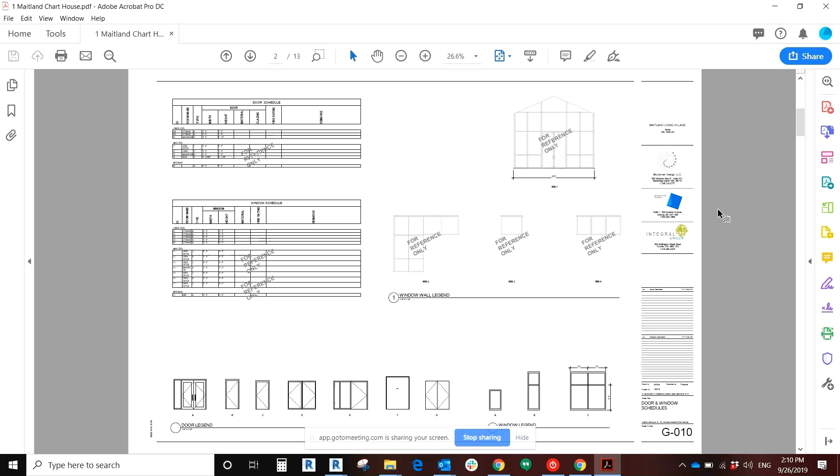And this has the drawings for the entire chart house, but we're really focusing on trying to coordinate the basement related stuff so that you guys can start doing things on the site in the next few weeks. I think we're trying to get you some coordination drawings by October 8th. So, drawing set. We have our cover page. We're starting to build out the doors and windows schedule, and we're just going to go pretty quick here so you get the lay of the land, but feel free to stop me if you want to zoom in on anything.

We have our assembly drawings, so we're going to have the basement floor similar to what you guys were originally planning, with the insulation below the slab, and then a radiant floor downstairs over the slab with the topping slab. The main level floor, currently we're designing it also to have a radiant slab, and we'll get into the full mechanical system in a few minutes here. The roof assembly is the same as you had originally been thinking in the original drawings.

Okay. And I do want to point out that we're wanting to get Pete's feedback in particular, and Todd's. If there's any details that you guys think we should modify, then we're very open to that. This is the current thinking, and included in that, of course, is this whole discussion around insulating the walls or not on the lower level, and those kinds of things. So I'll let Blake continue, but I just wanted to set the stage that this is a collaborative process.

We have been getting information from Integral that's informing us in terms of needed R values and implications and occupancy, and now we're at a place where as we run through this, we need to make some decisions with your help, and then we can make changes as we need to any of these details as a result of those decisions. Mm-hmm.

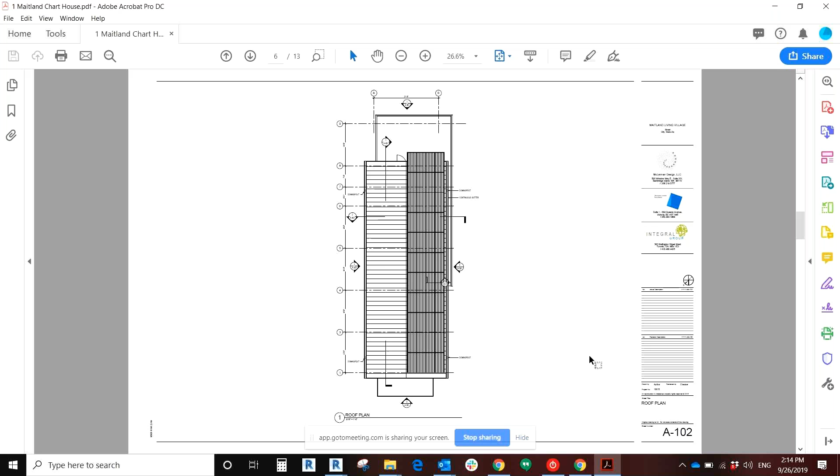The PV extends. Yeah, there's a bit of a drawing glitch here that the PVs would not overhang the roof, but the idea being that photovoltaics would be on the south pitch, and we're looking at having supply and exhaust for the ventilation system on the north roof, which isn't drawn here yet. Then we have reflected ceiling plans, where we're starting to show first pass at lighting for each level. The elevation, so this is reflecting what you've all seen in the renderings that we've been sharing with you.

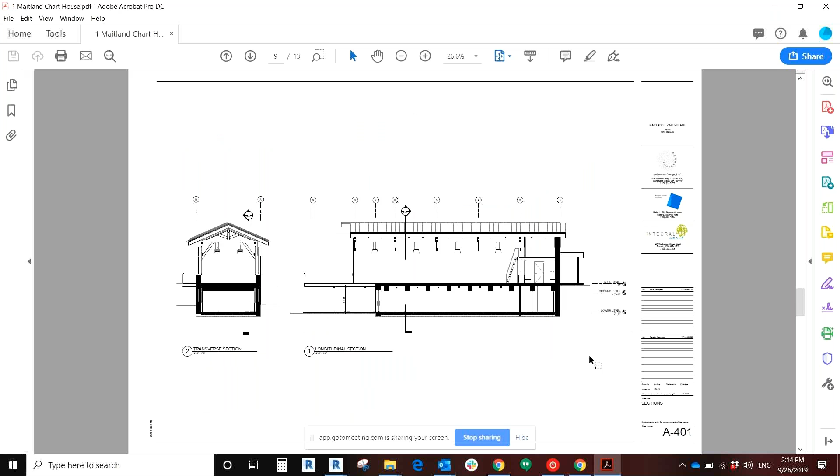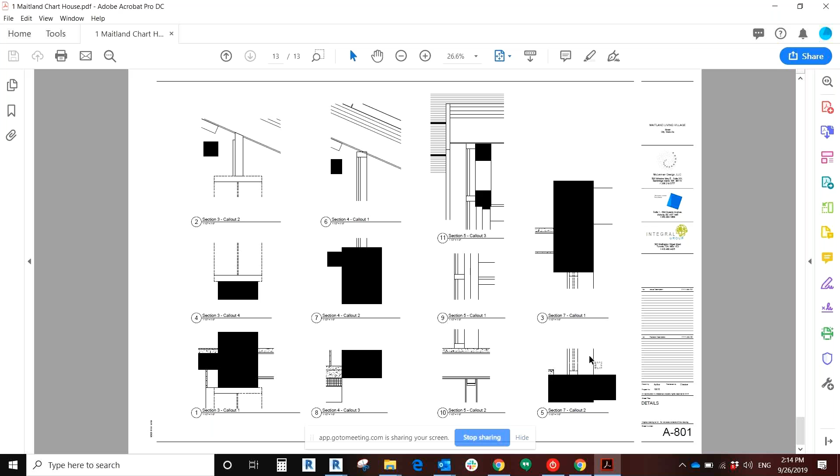And then building sections, enlarged plans for the upper and basement level washrooms. And then these are very much in progress, interior elevations. These are really just placeholders at this point. And then also placeholders, wall sections, and then we'll be drawing the details in the 800 series. So that's the way the drawing set is built currently. And then you want to do the MEP?

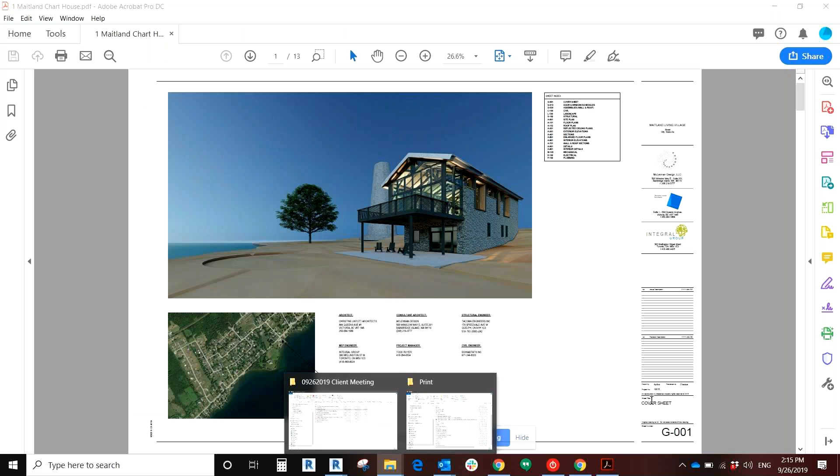Walk them through the MEP. Yeah. So why don't we pull up Integral's last set of sketches, even though we're changing things. I just got a question on the mechanicals on the outside on the east side wall by the front. Is there any way to disguise those things? Because it's very visible from the street, right?

I know. Well, we're going to want to put it in some sort of enclosure, some sort of wood enclosure or something. But the building is really public on all sides, or will be eventually, right? So yeah, it's probably the lowest value. We don't want to have it in the plaza side, and we don't want to have it on the side with the solar panels, because we think that's going to be more public, and we do think that driveway there is more of like a service drive as opposed to a big public access point. So it seems like the best general spot, but then we need to build a screen around it.

Does that make sense? Yeah, it is obviously a pinch point really with the deck there, right? In terms of access, I guess. You mean the front entry porch? No, I'm talking about the neighbor's deck that sticks over on our property. Yeah. I mean, we could push it downward a little bit, but it is relating to the equipment that's in the loft in that area. Right. Yeah.

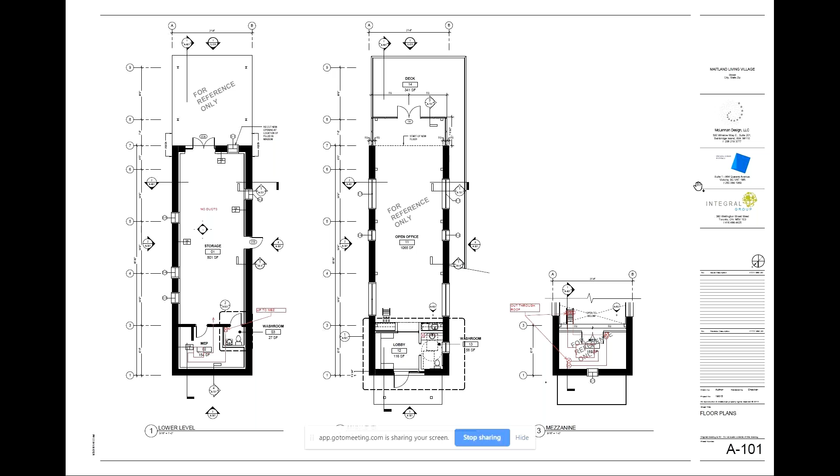So the condensers are for the ERV system. Yeah. Okay. So these sketches show, I guess we can't really zoom in too easily, show some back and forth that we've been doing with Integral, and so the big idea is that we have fresh air requirements and we have heating and cooling requirements, right?

The fresh air is being handled through an energy recovery ventilation system on both the basement level, which will be very small, and then one for the main level, which would be held in the attic, which would be a bit larger. And we're designing this to accommodate an occupancy load of about 35 people. On the upper level. And that's not to say that you couldn't have events with upwards of 50 people. It's just at the very highest peaks in the summer and the winter, the equipment's being sized for 35 people.

So we have this tension, as you guys know, in terms of what kind of building this is legally being described as, and we're describing it as an office building, which has a particularly low occupancy. But we want to be able to use the building for larger functions, and we think it will be. And so the question then is, in terms of the mechanical system and ventilation rates, where do you size this to? Which reality? And we don't want to size it so that only 12 people can be in the building at any one time; that's not a very sustainable thing when we want to have other events.

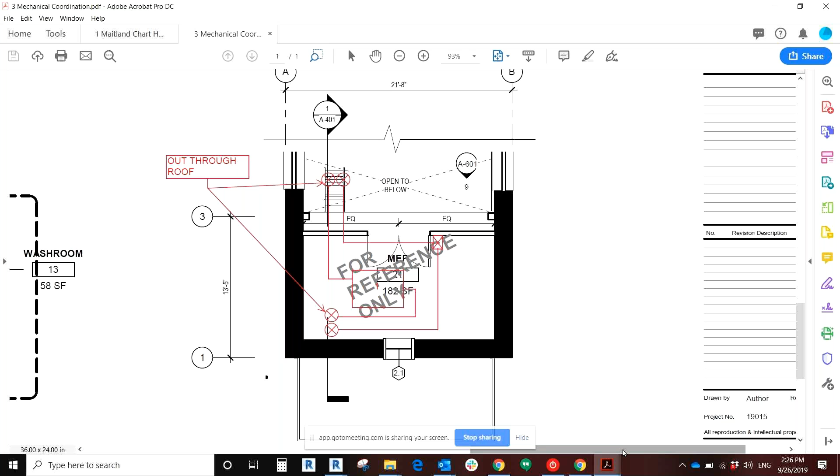But the only risk is still that when you run ducts through the space, which we have to do in order to get proper distribution, there are ducts running through the trusses on both sides of the building, from the entry side all the way to the riverside. And there will be some noise that will come through those ducts, the air movement, etc. Sure. We could presumably have a flexible plenum at or near that baffling wall, right? To kind of attenuate some of that.

Would doing a larger diameter pipe do anything on that, or is it counterproductive from a flow perspective? Well, usually Integral is pretty good about trying to specify low pressure drop, low velocity, large duct systems. Okay. And so we can circle back with them on the pressure drop issue. But at the same time we're a little bit limited on the area within the trusses that we have to run the ducts through. Yeah. So it's always a balance of those things.

So we'll just reiterate to them again that we're trying to attenuate noise as much as possible, and we want to make sure that the ventilation isn't straining, so to speak, and therefore creating additional whistling or any other noise. Yeah, and that's great. It's just nice to mention the sensitivity and say, if there's an extra little mile here, I'm motivated for that, right? Yeah. It helps, because sometimes they focus on, it's a little cheaper, and you're going, well, to me, those are things you live with for the whole life of the building, and every day.

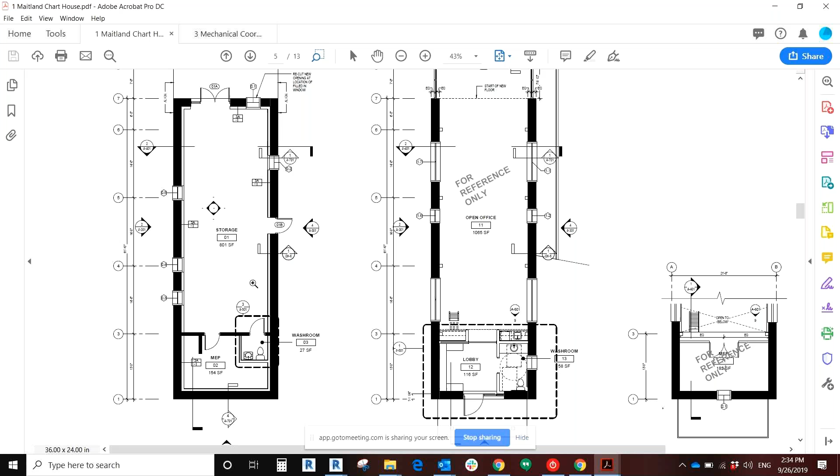So sort of similar to how you draw radon from underneath the floor. You could similarly intermittently pull moisture out between your insulation wall and the stone. I know it sounds kind of Inspector Gadgety, but I think it's a useful direction to think about.

I think a moisture professional is helpful. We actually were not ever planning to insulate the stone wall. It was planning to be covered with a lime plaster, and so the upper part wasn't going to be insulated. All of our research was from Europe, where they're trying to retrofit 6 million stone homes, right? And to their chagrin, all of it kept coming back saying, don't insulate, because if you insulate, then it leads to a premature failure of the wall. And that's one of the things that document that I sent to Blake indicates.

John Cook, it was interesting. Jerry, the engineer, was here as well yesterday. And he knows John, and he said it's hard to find anybody better than John. He said that's probably not what you could say about his competition, but that's where it is. And John's pretty adamant that this masonry will fail.

Yeah. The room in the basement, the old walls were cladded with studs and a tongue and pine, and the studs did not have any rot to them. But Pete and I were talking about this earlier. There were many spots on the walls that had experienced significant mechanical failure in the masonry, and the masons had to do a lot of significant repair. At one point, right on almost to the outside of the building. It's hard to say whether that was the result of even that little bit of buffer there or not.

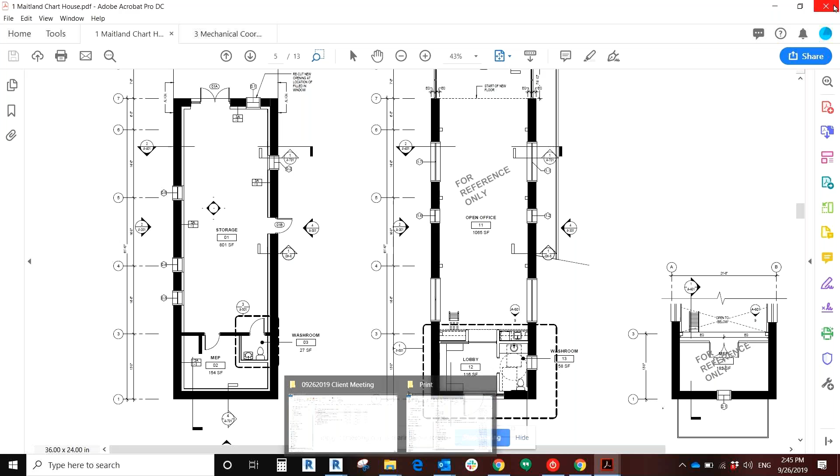Okay. Should we switch over to septic strategy? And why don't we pull up the... Oh, what about the point cloud guy? Has he come and finished his work? Or am I missing the timing on that? I thought he finished his work and went home. Okay, so we haven't received his product yet that I'm aware of. Okay, we'll follow up, but he did come. Okay. Yeah. Jerry was really interested to receive that as well for the building.

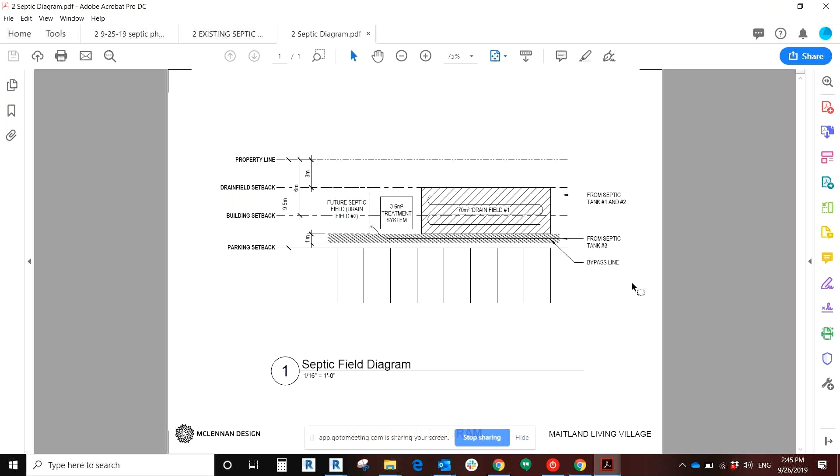Of course. And by the way, Juan was going to get after you, Blake, because he wanted those drone videos. Oh, okay. Yeah, I'll send those right over.

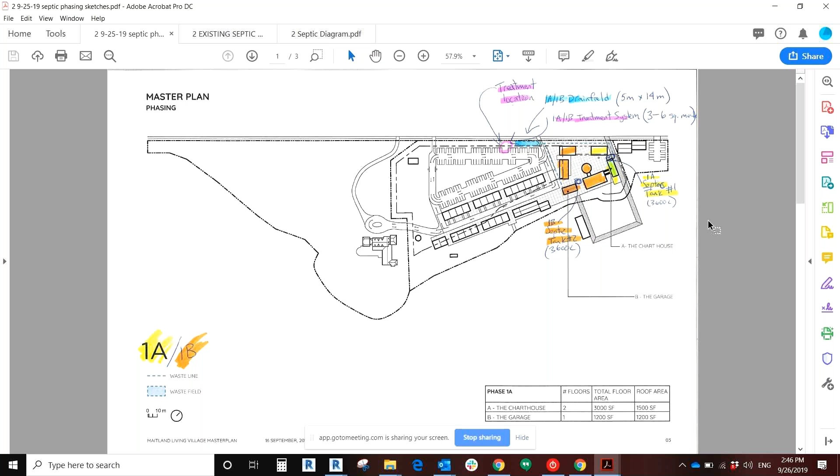Okay, so why don't we go to Pete's sketches first? Sorry if this is a scribbled sketch, but we've been throwing a lot of ideas back and forth. This is over an older iteration of the master plan, so we don't need to look in too much detail. But generally, the idea would be for the chart house, we'd have the septic tank to the side, as we were showing in the previous drawing. And then from there, it would be pumped over to a drain field, which is shown in blue along the road.

And we have a more detailed drawing that shows the required setbacks and everything of that drain field from the road and the property line, which we'll get to in a second. And there would also be a little treatment area associated with that, and both the drain field and the treatment system would be sized for the future construction of the yellow building and the 2 or 3 orange buildings here, if you point to those 3. So it would be oversized for the chart house, but it would be in anticipation of those 4 buildings coming in the future.

And then when the building adjacent to the tower gets constructed, another septic tank, number 2, would be added, and you can point to that, which would then be pumped up to that drain field that had already been sized to accommodate it, to that light blue zone there. So does that conceptually make sense?

Looks good. I like the idea that it's as far to the edge of the property as possible, because we're probably going to be playing sort of like Tetris with wells and septic fields and stuff like that over the years. And I like the idea that it's as far away from potential wells as possible. Yeah, I think the requirement, if I remember correctly, is 50 feet or something like that. Oh, well, I think it's 100. It could, yeah. I think it's 100. Yeah, for the drain field.

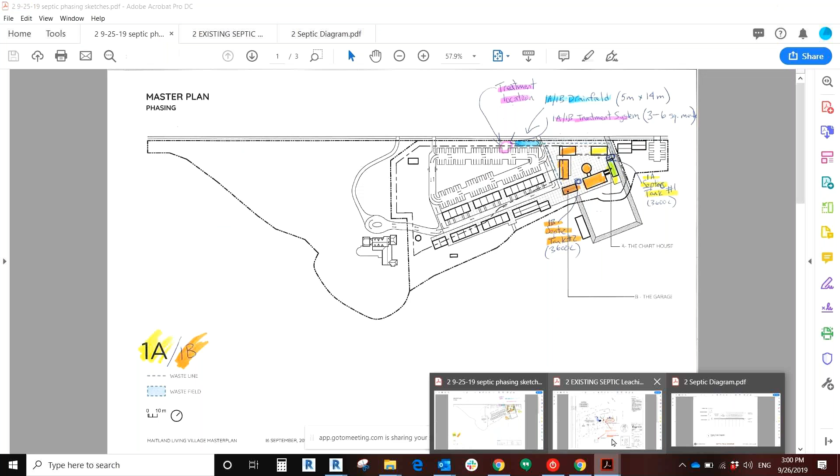So to the extent that we can start preparing the work that's needed to be done anyway for the chart house lower level, and try to determine what the contours of that rock ledge are, that would be very useful. And we can float around the exact location of the septic tank if we know the extent of our limitations. Okay, so maybe we get Luke in and peel back the concrete closer to the ledge, break it right at the edge and then see where the cliff really ends up being.

Would that make sense? Well, I think what Jason's talking about is doing the excavating all around the chart house so that we can complete the drainage work, which is work we have to do anyway, and that will give us a reveal of where the bedrock is. Oh, okay. Yeah, let's get going. Okay.

Our goal is for you to be able to place that slab in the lower level and get the lower level moving forward as soon as we can. We've just been having to do enough due diligence on the overall building to make sure we weren't painting ourselves into a corner on some other issue. I feel like we're getting close there.

We still need to talk to Integral one more time about the idea of using the river water for preconditioning. We need to check on a couple things, but I'm hoping that we're very close to being able to say go under your existing permit, and let's start getting that slab in. Let's start getting everything into the lower level.

So it seems like we're already there in terms of clearing an area around the perimeter of the building to start getting ready to put drains in and all that. Might as well get that going while the weather's still not bad, if you guys agree. Oh, go ahead, Pete. I think we'll gain a ton of information from that, and it would also be nice to have the weeping tile and the dimple board, et cetera, outside. I think that's a good forward step.

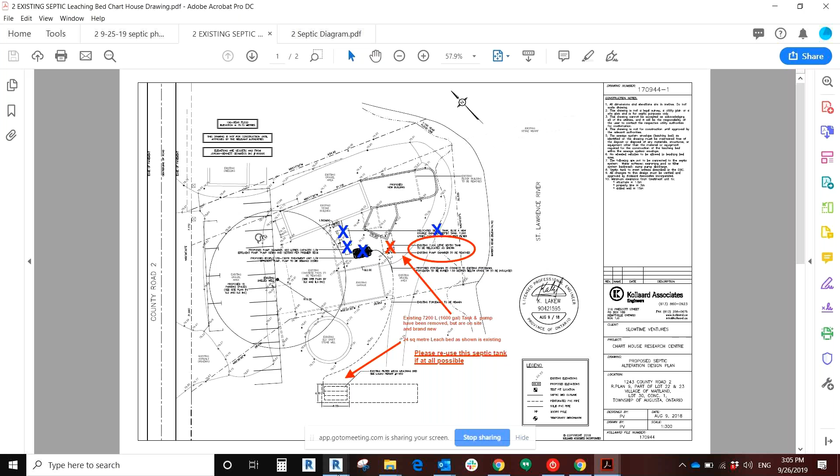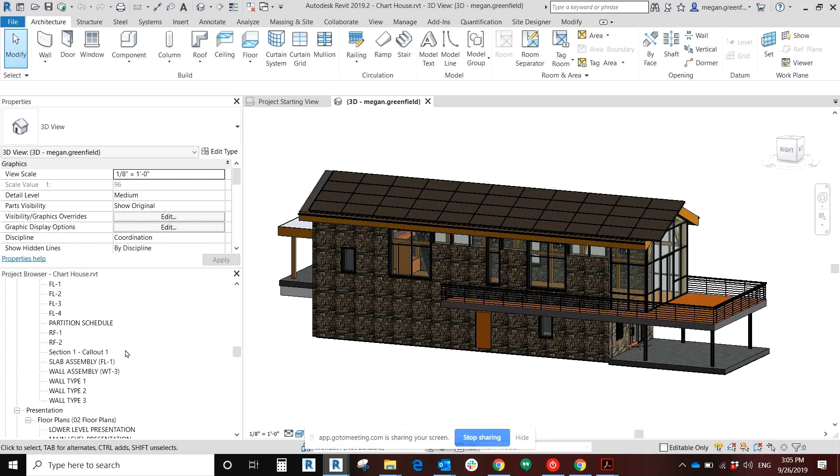And then, I think the big thing is that anything we're putting in the building now, whether it's the drainage system or whatever, somebody is tracking for the materials petal requirements. And I think that's Michelle from what we've discussed, because we don't want to trip up and use the wrong stuff in that area. So that's the critical path. And fortunately, now that it's stripped back, it's a much simpler proposition material-wise. Absolutely. And I'd love to get materials. Materials is something that always drives me crazy with all the crap that's in it. So I know it's a big burden, but it's a worthy one.

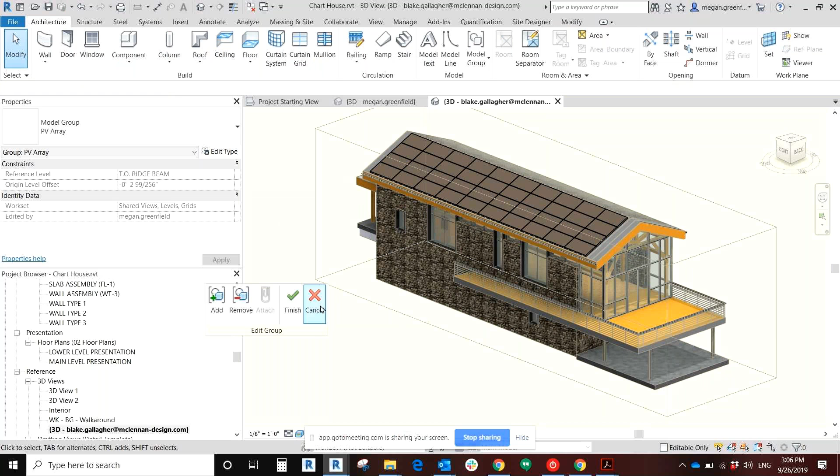Okay, good. So I guess what I'm saying is if you want to go for it, you could go for it. And I don't see now a reason why you can't, but then we better get on the materials stuff, since Pete's going to be needing to get materials on hand. We'll need to make sure they're compliant.

Okay, so what I'm hearing you say is that the only risk is maybe not enough solar, and we just do as much as we can do. What I like about that is it means we don't put in some outrageous amount that ends up not getting used, that we'll actually be able to occupy the building, track the use, and then say, oh, we really only need another 5 kilowatts or whatever to make this net positive. And then the other buildings in the plaza will come in, and there'll be opportunities for overage, hopefully. And then at that point, we just go for the final piece. That's correct. Okay.

Could I just add that solar has gotten cheap enough that we actually sometimes see people putting PV on the north side of buildings? Since our building isn't even strictly east-west, that may be worth something to look at. Yeah, you're right that it's starting to show up in places that 15 years ago someone would have been shot if they had said they were putting solar in those locations.

So you're right that if we just needed a little bit more capacity in the end, we could put it on the other side of the roof maybe and make it up, knowing that it's generating much less capacity. But that is an acceptable solution. It would be biased. What's that?

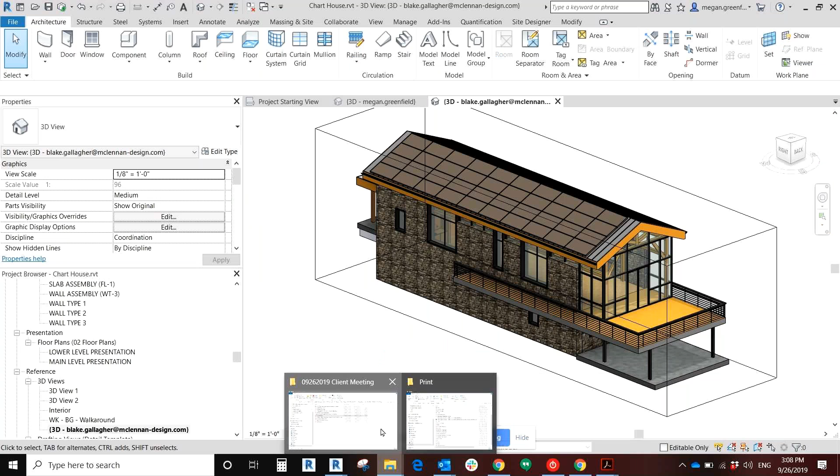There was a question that we had an email exchange about, the entry to the building and the width of the accessible bathroom, and how we were planning on sort of hiding that condition. Are we all in alignment on that? We'll try to go to it. It's not ideal, but we're working within existing confines here. Hold on, we're going to zoom in. Yeah.

So, as you accurately point out, from the outside, it looks like underneath the lintel there is an insert which would have a door, a glass panel, and a solid opaque panel. And that opaque panel would hide the fact that the accessible restroom has to poke out. And we have to have it poke out if we're going to make this an accessible bathroom. And for Living Building Challenge, it has to be an accessible bathroom. Of course. And just for decency as well.

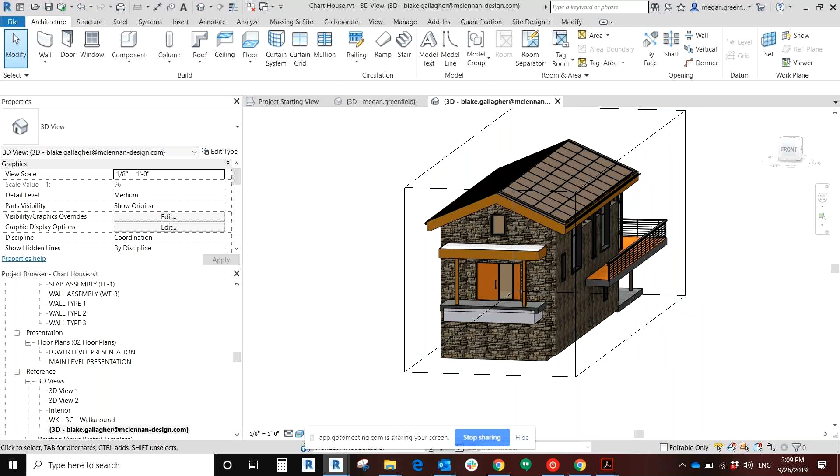And there's a question of whether, we're not showing an accessible bathroom right now on the lower level. That's a question we should be asking ourselves down there as well. So I think I would do it. If we start, we might as well plan for it now, because that separate use downstairs, like you said, it'll be like a completely different building down there. One of the thoughts I had already was getting people who have accessibility issues into the water in that kind of space, and therefore having an accessible washroom downstairs would just make sense anyway.

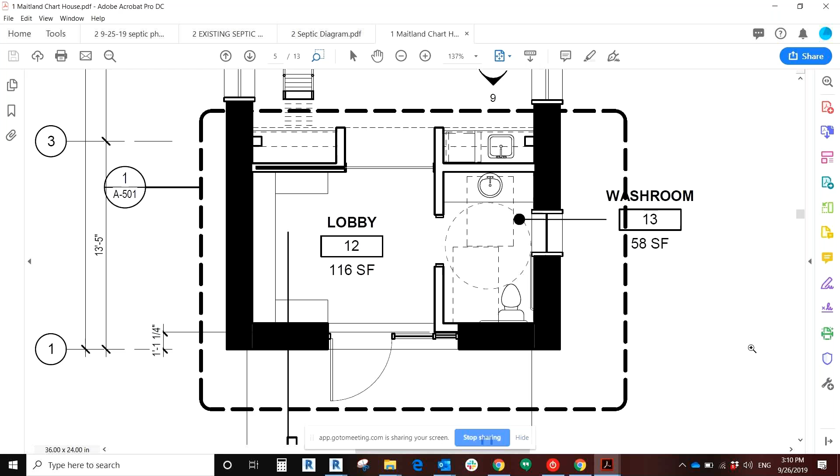You said yes to accessible downstairs. Is that what you just said? Yes. Okay, so we have your buy-off here. Is there any other design feedback that you want to give us? Right now we're showing some sort of built-in seating when you come in to the left of the lobby, and then there'll be some sort of partition, potentially acoustic, that allows you to separate the lobby if you wanted to. And on the other side of the wall, there's a little kitchenette with the dishwasher below, the sink, a little bit of storage. It's not a big kitchen, but it's what we have.

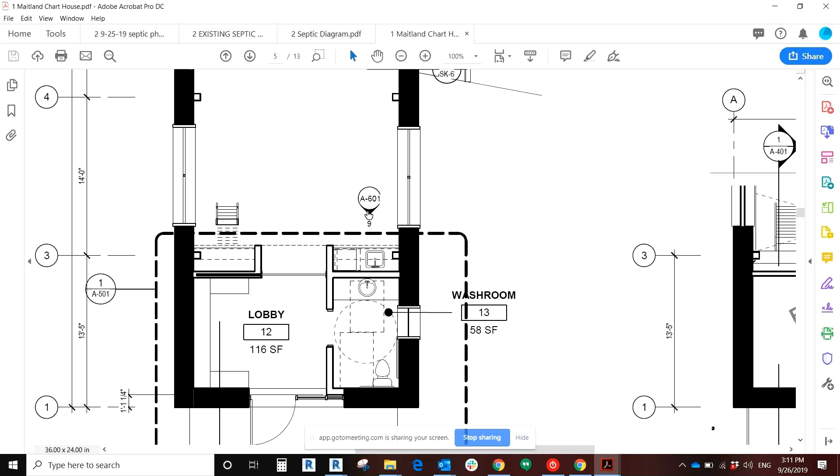And there'll be some sort of ladder up to a hatch to get you up to the loft, where you can use the loft for storage of chairs. I think that ladder will slide right over to the center. Yeah, and the center is where the opening is. Right. Kind of like a library ladder? You got it. I like all of that.

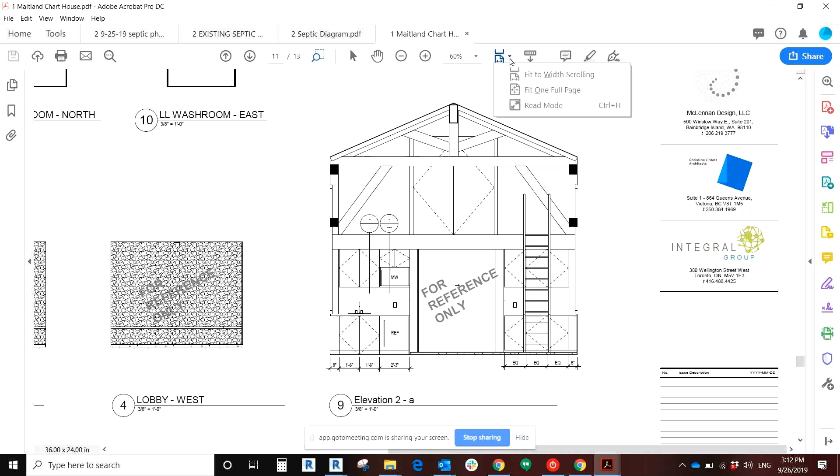I like the idea of going into the front, because of the stone, it's your chance to interact with the stone when you hang up your coats on that left side, which I think is great, because then it's a very personal contact. Then the division of the vestibule I think is great, because you can think of many events where you want to prepare people and have that separation of the shuffling that goes on up front, compared to what's going on in the space, which may be a small concert, something quiet, or some meetings where that would make sense.

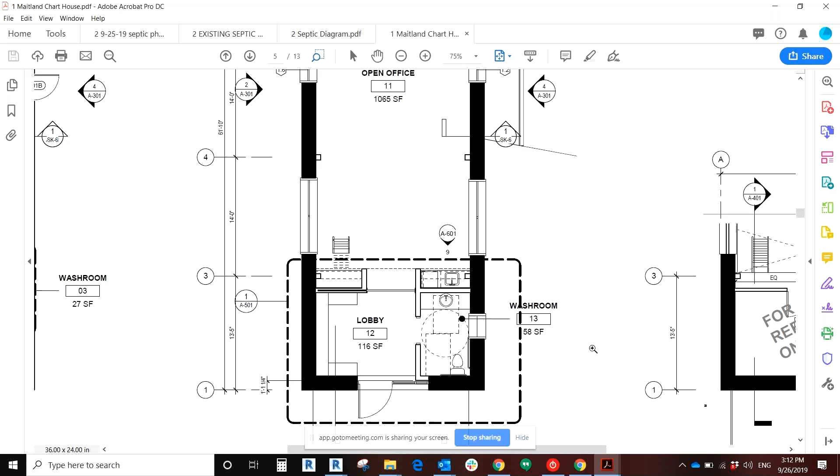Yeah, the interior design is pretty straightforward. We're letting your trusses shine, your stonework shine. There'll be some hanging pendant lights in that space. There could be ceiling fans if we want, with lights in them. Wood ceiling. We need to decide, are we doing a wood floor over concrete in the upper level, or is it just a concrete topping that's polished? That's a decision you need to make with us. How soon? For the upper level.

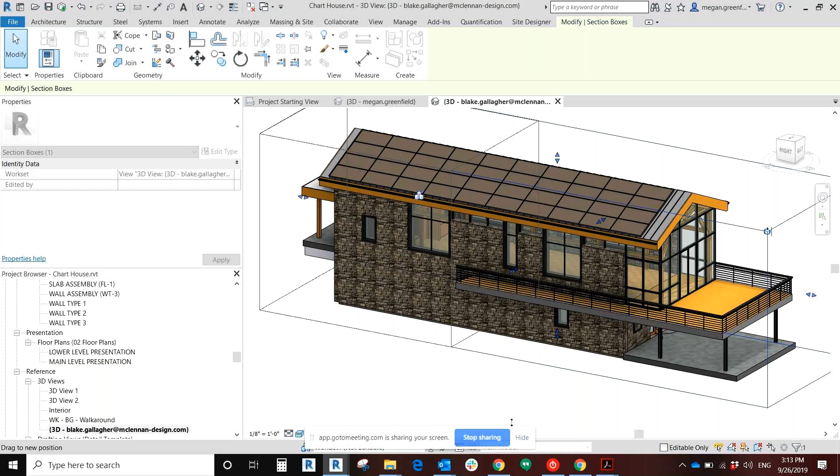How soon? I thought we had talked that one through. We had wanted to put a Warmboard type of finish over top of it, so we could not have the heat tied to the thermal mass of the slab. Or is that not relevant anymore because of the different proposal for heating?

I'm not sure exactly what you're referring to. We were assuming that there's a radiant system in the topping slab. Okay. Yeah. So because the slab is tied to the walls, and when you put radiant in the slab, as you know, it just takes so long to heat up. There's a long transition, and so we thought because the building might stand empty for periods of time, that it would be better to have a quick response system like the Warmboard system.

Yeah. No, we have a quick response system with the air system tied to the slab. So this particular design, if I understand it, the slab is just helping to temper and ameliorate the conditions so that the air system doesn't have to be too huge, but the air system is doing some of the work alongside the slab and allows you to have a quicker response. Is that your understanding, guys? Yeah. No, exactly.

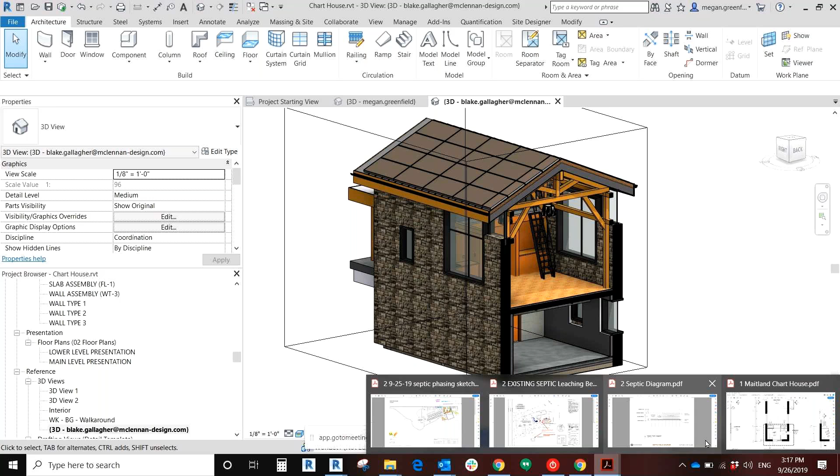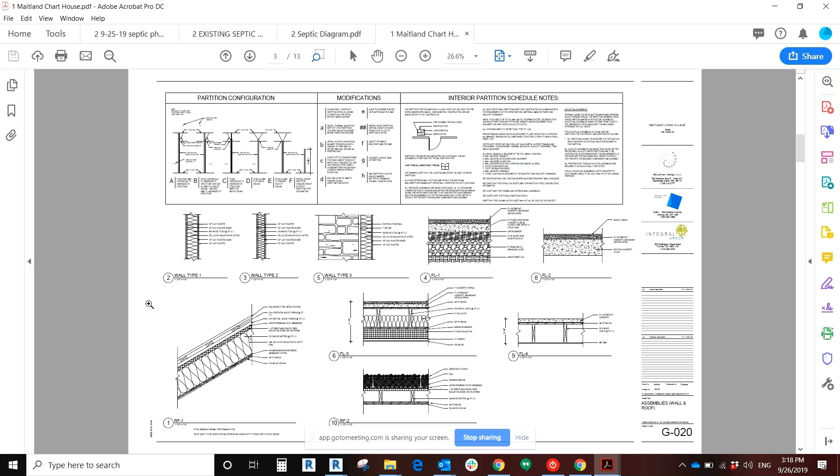Yeah, the one that popped right out at me was a difference in code interpretation that Bobby and I had. And I went over it with our inspector, and she's definitely like, yeah, you don't have to do that. And it would save like 100 2x4s or 200 2x4s or something like that. Okay, what is it? In the cross section of the roof with the insulation and the strapping, we don't need to be looking at the end of a 2x4 because we're going to have plywood in that plane. Doesn't need the double strapping. It doesn't need double strapping.

Got it. So there's a 2x4 strapping that runs parallel with the roof joists, which gives us the air space. Yep. And then above that is the plywood, which gives us a good substrate for the standing seam roof. There's the plywood there. So you get rid of that interstitial bit with the furring.

Yeah, with the standing seam roof, if you have strapping running sideways rather than plywood, what happens is when you get people walking around up there, they dent it. And also sometimes you can see the strapping through the reflections in the roof. Yeah, depending on the gauge of the metal. Okay, cool. So mark it up for us, okay? Yep. Great.